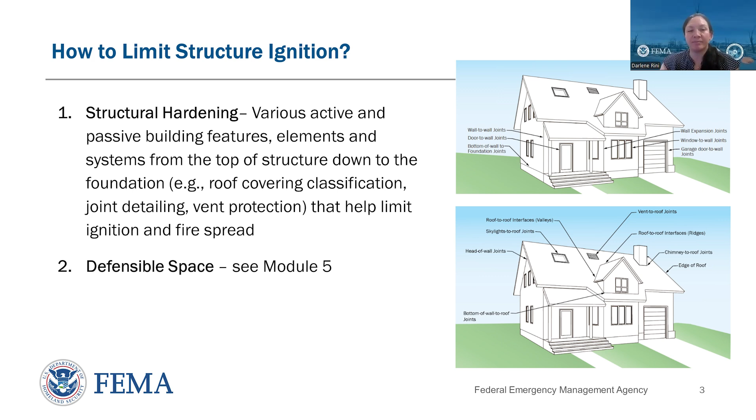Module 5 will go over aspects of defensible space, which is the immediate space surrounding a home or structure, also to help slow or stop a wildfire from reaching a home or building, and also helps reduce the likelihood of structure ignition. So residential roofing systems are a key area of known wildfire vulnerability.

Many homes burn from the top down during fire hazard events. There are several mitigation strategies that can be taken to help protect roofing systems. This includes installing a Class A roof per ASTM E108 or UL 790. This could include asphalt shingles, concrete, brick, etc. The entire roofing assembly should be Class A, not just the roof covering.

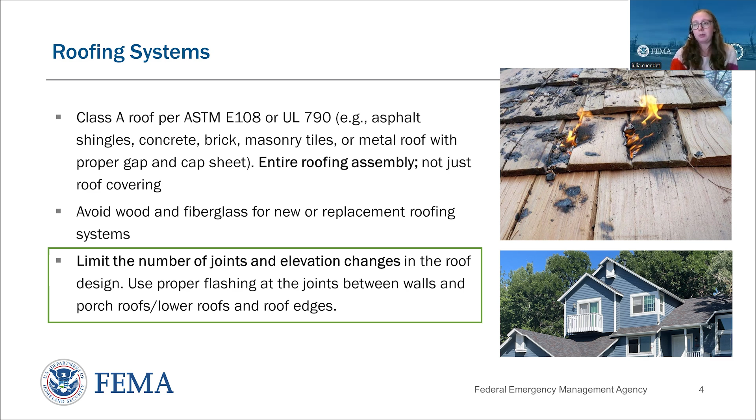Wood and fiberglass for new or replacement roofing systems should be avoided, and the number of joints and elevation changes in the roof design should be limited. Proper flashing should be used at the joints between walls and porches, porch roofs, lower roofs, and roof edges.

Roof valleys can create areas for debris and embers to collect. This could lead to ignition of the roof at the joint if it's not Class A, or if the valley is combustible, or the adjacent non-fire rated cladding on the adjacent wall or dormer could ignite. Additionally, interfaces between the roof and wall systems can leave parts of the home vulnerable to ember intrusion if gaps are present.

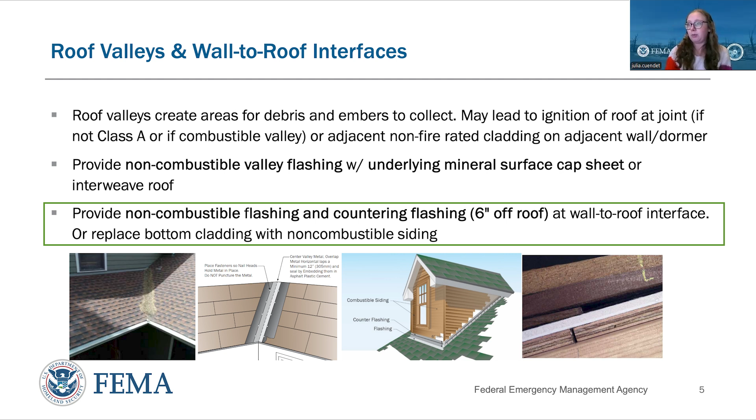There are a few ways that these areas can be protected from these vulnerabilities. One way is to provide non-combustible valley flashing with an underlying mineral surface cap sheet or interweaving the roof. You may also provide non-combustible flashing and counter flashing 6 inches off the roof at the wall-to-roof interface, or the bottom cladding can be replaced with non-combustible siding.

Edge of roof systems present areas where easily ignited debris can accumulate, as well as, if left unprotected, can lead to ember accumulation and/or intrusion during fire hazard events. Mitigation strategies to help reduce these vulnerabilities include using metal gutters and downspouts, installing corrosion-resistant non-combustible drip edge flashing from the roof to the gutter, using tightly fitting flashing against the gutter, or providing non-combustible gutter covers. Using enclosed soffits or appropriate vent screens and batts in soffits further helps protect these areas.

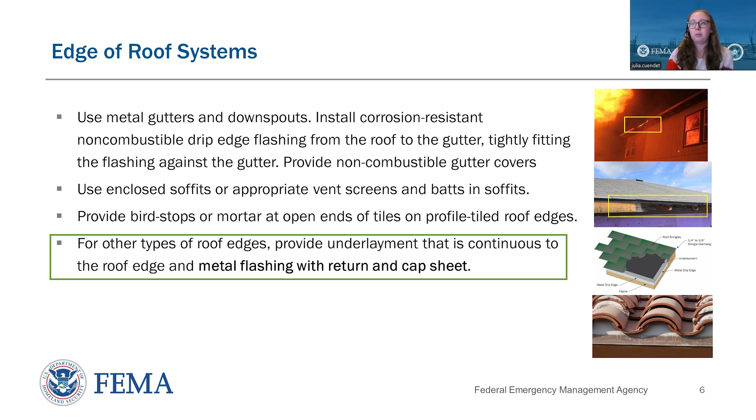You may also provide bird stops or mortar at open ends of tiles on profile tiled roof edges. And for other types of roof edges, you can provide an underlayment that is continuous to the roof edge and metal flashing with a return and cap sheet.

All edges, joints, and pockets created in roof design create locations for ember and debris accumulation. There are some actions that can be taken to protect vulnerable joints. This includes installing non-combustible metal flashing and counter flashing to protect the roof to combustible chimney chase joint for at least 6 vertical inches above the roof surface. You may also replace this area with non-combustible cladding.

For other roof penetrations, you can make sure the joint is well sealed to minimize the entry of embers, and roof penetration should be sealed per the manufacturer's instructions if not available. This should be sealed with fire-resistant caulk, non-combustible mortar, compressed mineral wool, fire-rated expanding foam, or metal flashing.

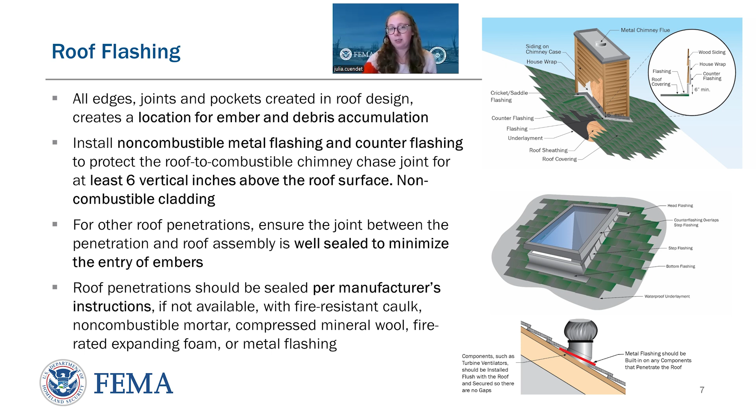Another key vulnerability in the exterior envelope of a home or building is the roof attic space, particularly when openings into the roof attic space are unprotected. This would include any type of roof vent that is open to the attic that can be located anywhere along the roof, such as the ridge line, mid-roof, roof eave soffits, gabled walls, or dormers. During a wildfire, especially during high wind events, embers can readily penetrate the roof envelope and into the attic space via these unprotected vent openings.

In addition, overpressures on the windward side of the roof, coupled with underpressures on the leeward side, can create this suctioning effect that draws embers into an attic space via both inlet and outlet openings.

This is a major concern and source of ignition, as attic spaces are typically constructed of combustible materials with a lot of exposed wood surfaces, as well as storage of combustible goods, furniture and storage boxes, along with a lot of collection of dust and debris, all of which are readily ignitable.

In addition, attic spaces are typically not provided with fire detection or suppression systems such as sprinklers. So if a fire were to start in the attic space, it will likely go unnoticed and ultimately lead to total loss of the building.

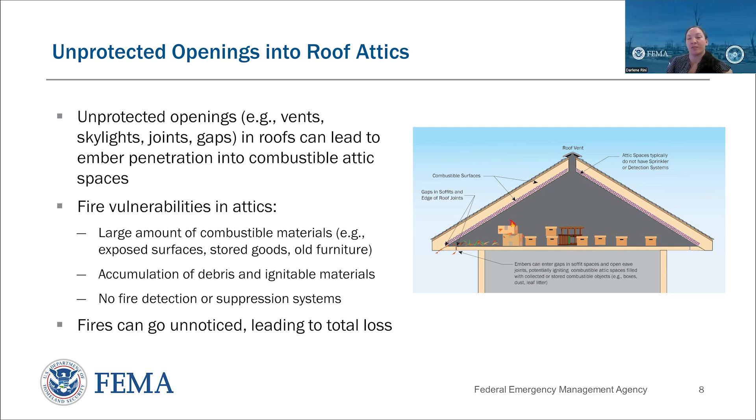On this slide, we're going to show you a video from the Insurance Institute for Business and Home Safety, also known as IBHS. This video shows a compilation of fire tests of various vent openings and associated protection measures.

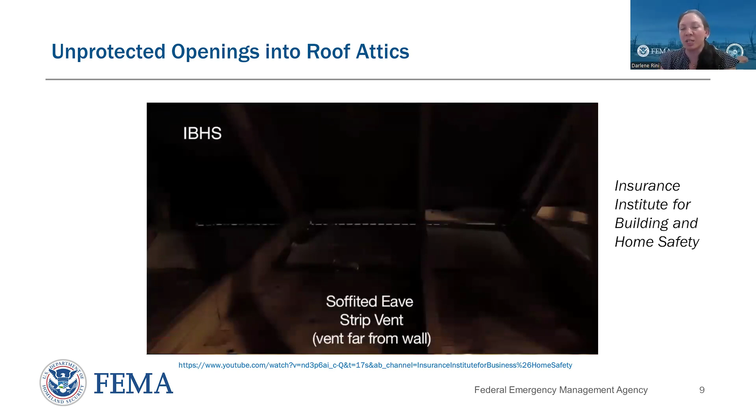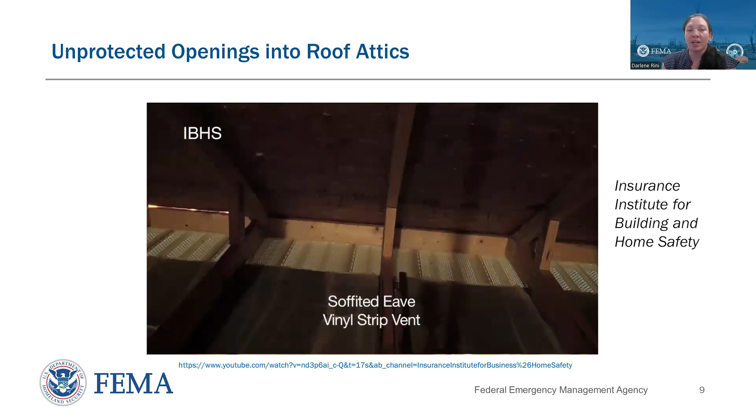As we see in the video, there's a series of different types of vents that could be found in either the soffit area of an attic space or along a gabled wall. This one is showing a soffited eave with a vinyl strip vent, and as you can see, there are some embers coming through along the interface of the roof line and the soffit. As these videos progress, there will be other types of vent details and varying degrees of ember intrusion.

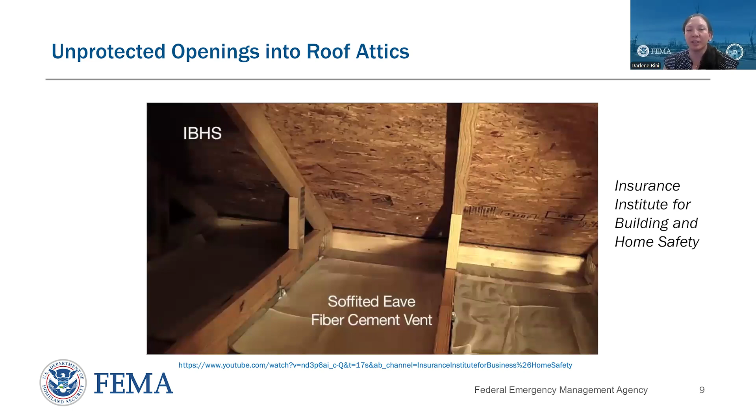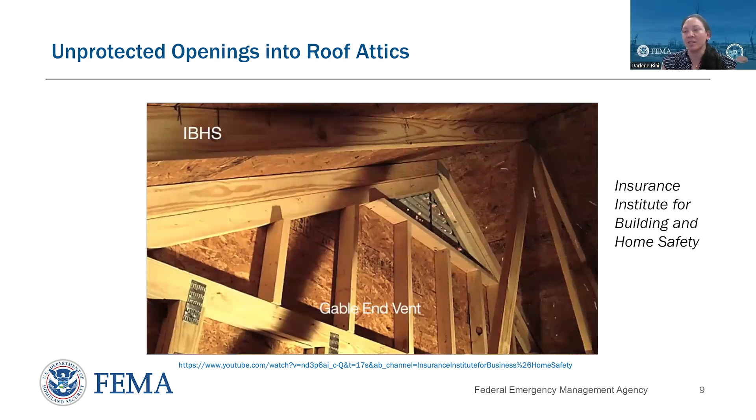Here's a different type of setup where we again have a soffited eave strip vent, in this case located closer to the wall. This is an example of a gable end vent where you can see embers readily entering the attic space.

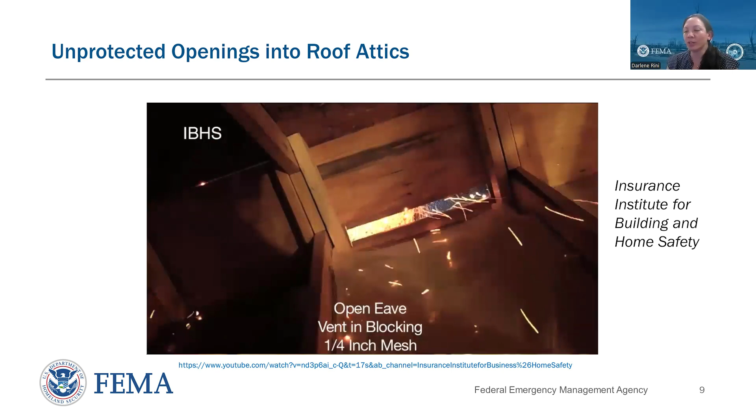Here we have just an open eave vent in blocking with the standard 1/4 inch mesh. As you can readily see, a significant amount of embers are entering into the attic space, given this very basic mesh covering.

We now have an open eave with a fringe block vent, again with a 1/4 inch mesh. There are, in this case, fewer embers entering, but still embers are readily entering into the attic space, where there could potentially be other combustibles that could readily ignite.

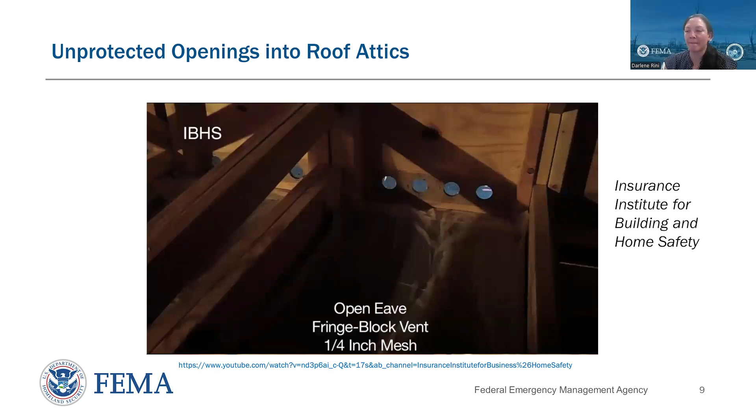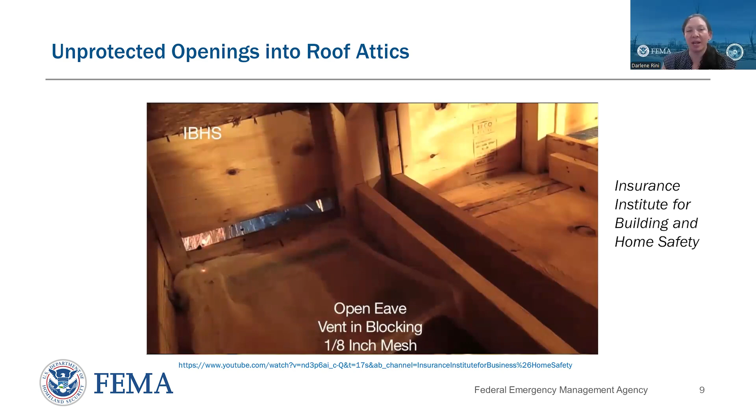Here we have, again, another open eave vent in blocking, this time with 1/8 of an inch mesh. There are still embers entering, although a lot less than the 1/4 inch mesh. This is a key finding we introduced into the Marshall Fire mitigation products, where the recommendation was to go to 1/16 of an inch mesh.

There are various mitigation strategies for vents. Some include covering all plumbing stacks, attic, crawl space, soffit, and ridge vents with non-combustible, corrosion-resistant metal wire mesh, having openings no larger than 1/16 of an inch for both new and/or retrofit construction.

Replacing any existing non-fire rated louvered wall vents, such as those for clothes dryers, with fire-rated, non-combustible, or fire-resistant wall louver vents. Be sure that after upgrading the louvers, they open and close properly. Also, as a reminder, do not use mesh louver dryer vents.

In the event that you're replacing or reinstalling vents, make sure to use a fire-resistant caulk to seal around the edges of the vent, which is helpful to not only prevent water but also ember intrusion between the vent and the exterior wall interface.

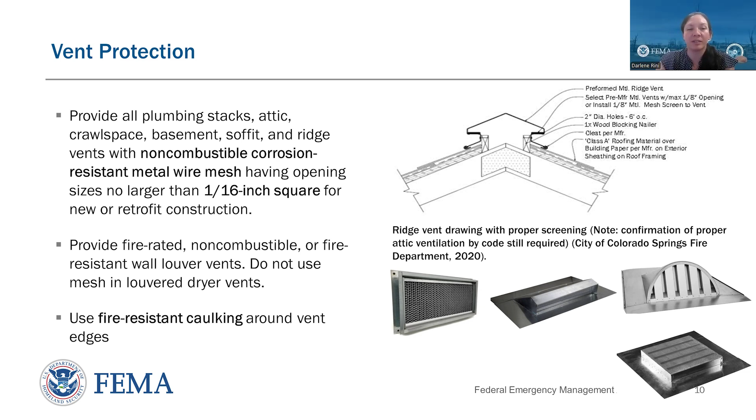Another critical area of the exterior building envelope are the wall assemblies. For the wall cladding itself, non-combustible materials such as fiber cement board, masonry veneer, or stucco should be used, and where possible for existing construction, providing 1 or 2 layers of 5/8 type X gypsum board on the backside of the cladding and wrap. This provides increased fire resistance to help not only limit potential structure ignition, but also help slow down fire growth and spread in the event ignition does occur.

For new construction in high fire prone areas, particularly for homes or structures closely spaced within 30 feet of another structure, 1 hour fire resistance rated exterior wall assemblies are recommended.

One area to also focus attention on is the bottom of wall to foundation interface. During the Marshall Fire and in other major wildfires, the bottom of wall detailing was another key point of vulnerability that was observed to lead to structure ignition.

At the bottom edge of exterior cladding and interface with the foundation, in some cases, the continuity of exterior cladding was not maintained at the return edge of the cladding. This left exposed combustible materials, as well as avenues for embers to potentially enter the wall cavity and lead to a concealed fire within the combustible wall space.

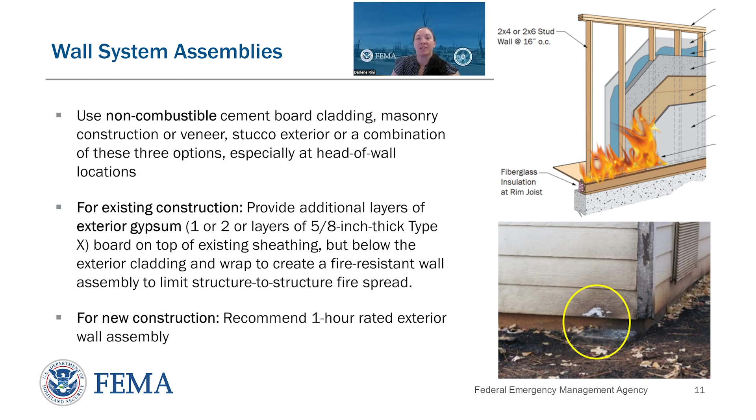This slide is just showing a more detailed example of this bottom of wall detail and that return edge. As you can see, there is some exposed combustible OSB sheathing, which again could be a potential site for ignition of this exterior wall.

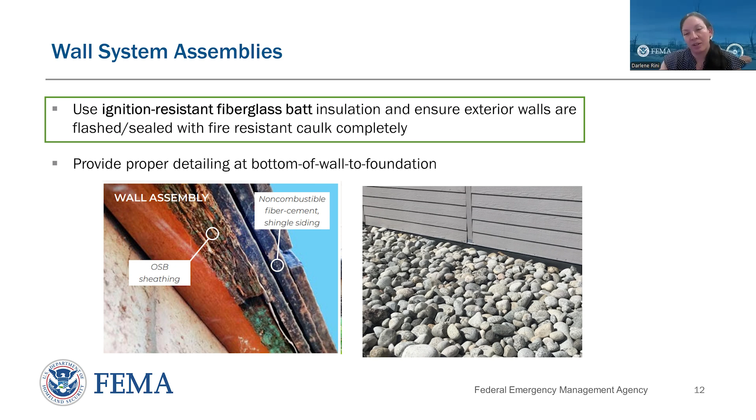The image on the right shows an example of a non-combustible cement board cladding system combined with a non-combustible ember-resistant zone 0, which is the 0 to 5 feet from the bottom of the wall away from the building. These two design features together provide increased resiliency along these details. Final note: for insulation, it's recommended that ignition-resistant fiberglass batt insulation or other non-combustible insulation be used to further limit potential exterior wall ignitions.

On this slide, we wanted to show a side-by-side set of fire tests of two different common wall assemblies that include vinyl siding. The one on the left has wood furring strips, a water-resistant barrier, mineral wool insulation, and asphalt paper. The one on the right is just vinyl siding with asphalt paper. As the test continues, you'll see that while the assembly on the left performs slightly better with respect to rate of spread, both vinyl wall systems perform poorly.

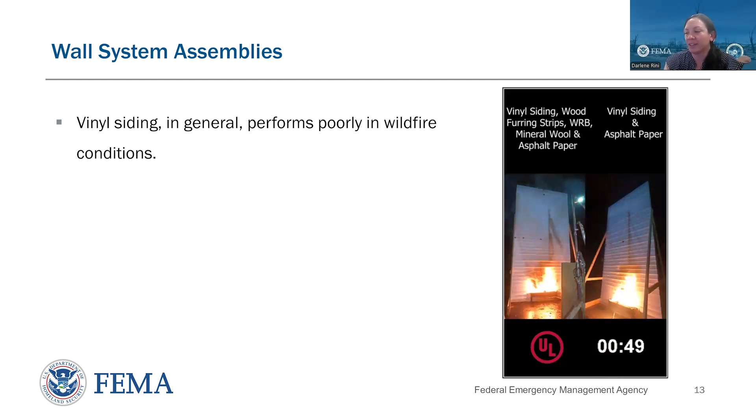Both walls are performing poorly from the beginning, and as the fire progresses, both assemblies perform quite poorly. Eventually, fast forwarding to the end of the video, you get full ignition of the wall assembly on the right, but the wall assembly on the left also performs poorly and likely would have led to ignition of the entire building.

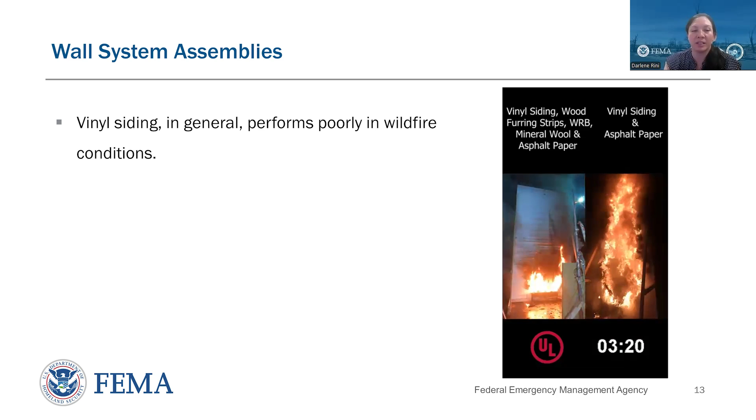In this video, we wanted to show that a wall assembly with fiber cement cladding, a known non-combustible and fire-resistant cladding material, can still perform poorly in fire conditions if the interstitial space of the wall cavity is filled with combustible insulation.

As this test continues, you'll see that the wall becomes engulfed. This is a reminder that even if you have fire-resistant cladding, that alone is not enough. We need to be mindful of providing non-combustible insulation materials to achieve the overall performance we are anticipating.

This comes up more often when we're concerned about meeting both fire resistance and energy efficiency goals. In those cases, we need to be reminded that while meeting energy efficiency goals, we also need to be mindful of not exacerbating any vulnerability or risk for fire resistance. So providing non-combustible insulation is prudent.

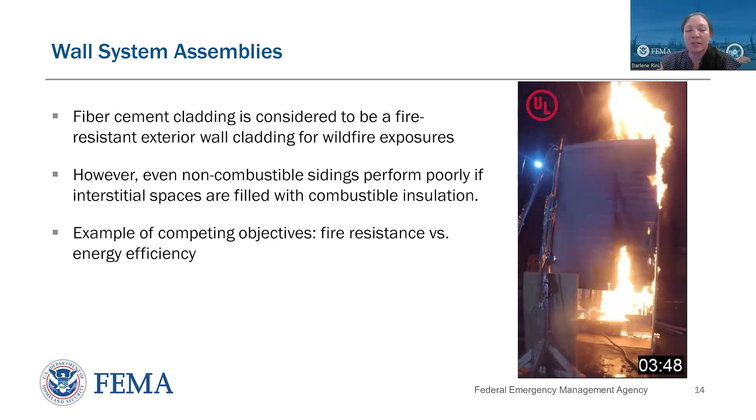Many joints and interfaces throughout the exterior of a home are vulnerable to ember intrusion. These include roof-to-roof joints, head-of-wall joints, bottom-of-wall to foundation interfaces, wall-to-wall joints, window and door joints or doggy doors, and garage doors. On the right, you can see many picture examples of areas where ember intrusion could occur in these types of assemblies.

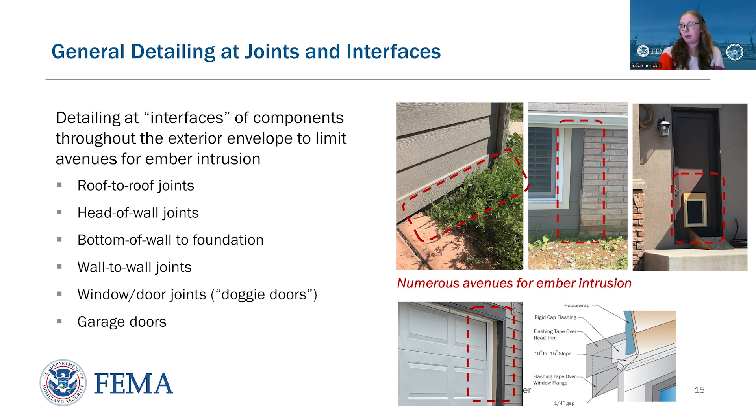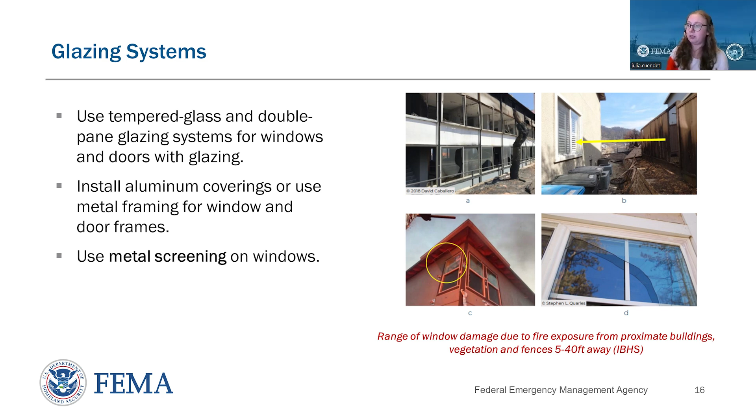Glazing systems can break due to radiant heat from debris, which can allow embers to enter the home. There are several actions to reduce the likelihood of this during a fire hazard event: using tempered glass and double pane glazing systems for windows and doors, installing aluminum coverings or metal framing for window and door frames, and using metal screening on windows. On the right, you see a range of window damage due to fire exposure from proximate buildings, vegetation, and fences between 5 and 40 feet away. This also comes from IBHS.

Attachments such as decks, patios, porches, and balconies can act as wicks that, once ignited from embers or direct flame contact, provide a direct vehicle for igniting the home. There are multiple ways to protect these structures: using non-combustible materials for deck framing, walking surfaces, railings, stairs, etc. is highly recommended, and all metal components should be corrosion resistant.

You can also space deck boards with a 1/4 inch minimum gap. Alternatively, use non-combustible solid walking surfaces such as lightweight concrete. You can also enclose the space under the deck, 4 feet or under from the ground, with corrosion-resistant metal mesh having openings of 1/8 inch or less. Alternatively, fully enclose the underside of the deck with non-combustible materials. If the ground below the deck slopes more than 10%, the enclosure should stop within 6 inches above the ground surface to allow for drainage.

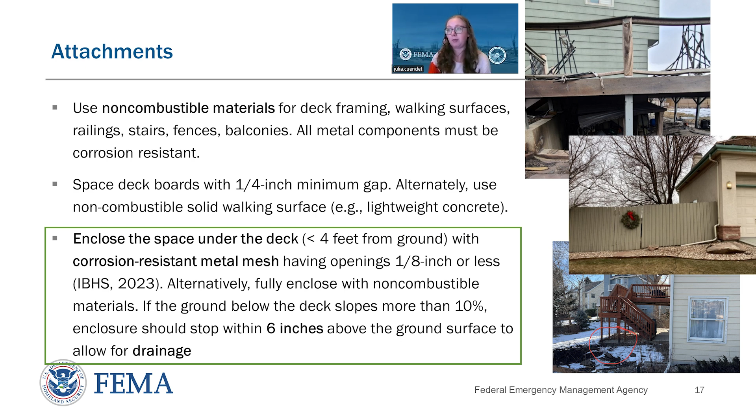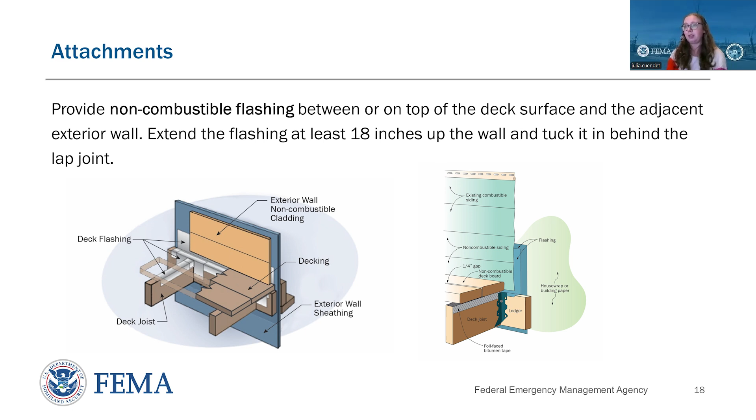You can also provide non-combustible flashing between or on top of the deck surface and the adjacent exterior wall. The flashing should extend at least 18 inches up the wall and be tucked in behind the lap joint. We have two details here showing the ideal installation of an assembly like this.

That's the end of our module for materials.